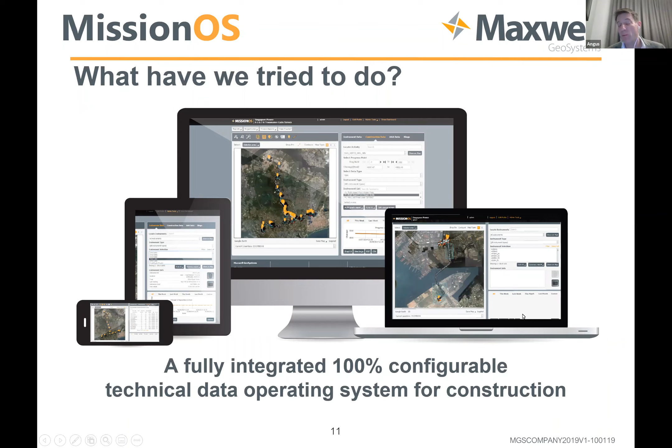Rather than sell the project, I wanted to go through a history of how we developed and got to where we are. The first kind of contract I was involved with was a good old-fashioned engineer's design using the ICE conditions of contract - called design bid build in America. This was a deep tunnel contract in Hong Kong called a strategic sewage disposal scheme.

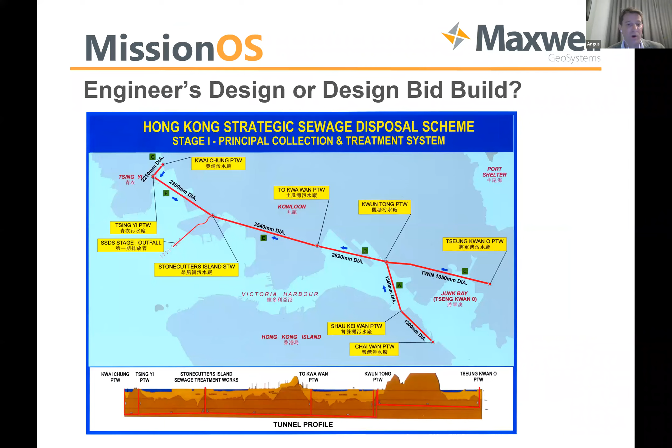Bill and I were both on this job when it went quite badly wrong, because we had lots and lots of water. This was the tunnel in 1993, and this was just one outflow from a probe hole, about 1,000 litres per minute, about 10 bar.

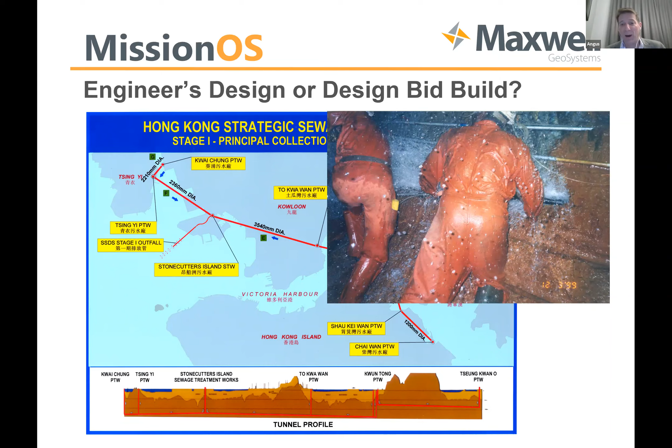Now, characteristic of these jobs is that there's two sets of records - the client's records and the contractor's records, with man-marking from both sides. So the focus the whole time is on which of these records is right, and what to do if there are differences in the record. Do you throw all the records out, or what? It's largely a waste of time really, because the lawyers have spent a lot of time looking at the data and identifying what is the data.

Ultimately, on this project, this is when I set up the first construction data management system, because I knew the contract was going to end up in arbitration. We set in place a system that managed every 15 minutes of time, and it was completely auditable - so if the shift report records said you had probing done or cutter changes done, there was a record in the system for that.

Now, the arbitrator on this contract identified the data records as being key to the outcome of the job. One side provided all the data, the other side cherry-picked the data that supported a particular case. As a result, the outcome of the arbitration, if you like it to a tennis score, was 6-love, 6-love, 6-1. This was an impossibility arbitration for a 26-kilometre tunnel project.

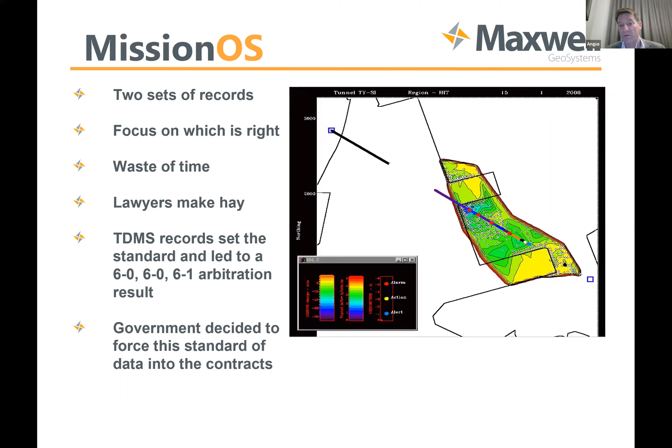Now, the government decided that they liked having the data in this sort of quality, so they decided to force this standard of data into the contracts. They actually wrote it into the construction contracts from then onwards. This was 2005 in Hong Kong.

You can see on the right-hand side and left-hand side we've got large span, low cover, large diameter machine going in. There's a second tunnel to be excavated between there and that big tie-back wall. We've also got a large hard rock TBM, and we've also got very poor ground conditions.

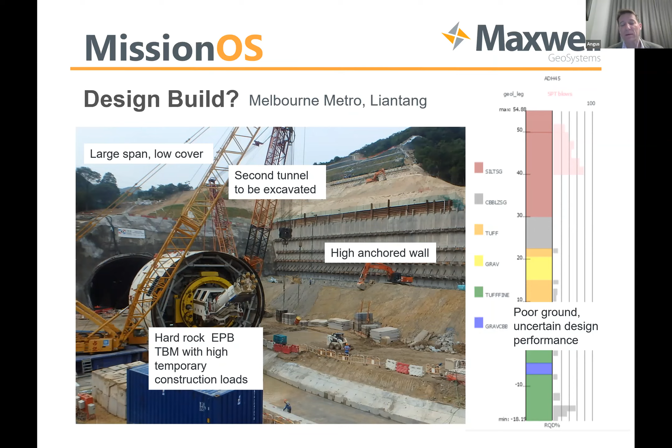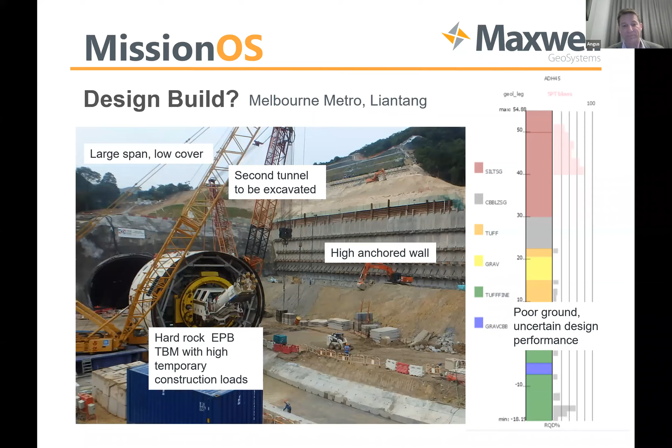The nice thing about this design and build approach was that whilst the system to manage the data was required by the client, after a period of time the contractors realized they could use this system to support the management of uncertainty. In this case, they used the system to log a lot of information supporting alternative designs to the construction of this portal. In fact, they saved about 7 weeks of program by being able to remove a lot of the steel supports by using the data effectively.

In this case, the client specified a system, and on the Melbourne job it was what's called a MIMS system—just the instrumentation plus a certain amount of progress of the works. In Hong Kong, the TDMS system, that's Tunnel Data Management System, has progress of the works plus the instrumentation plus the construction records in it.

Now, some contractors feel that a system put into their specification by the client is a noose by which to hang themselves. So there is a reluctance for them to actually conform to provide the records that are requested.

However, in the modern systems we can provide private areas. In this case, on this project, because the alternative design was the contractor's, there was a private area where his information could be used and kept private to himself for his own IP.

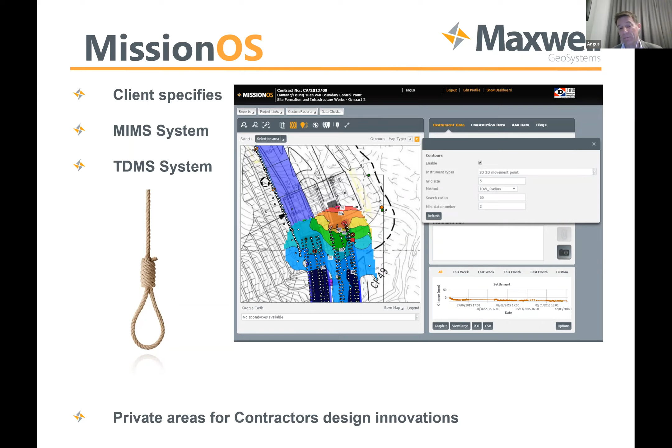Now, after about 2005, we entered into a period of alliances, particularly in Australia. They also did some alliances on particularly difficult jobs in Hong Kong. And now we've gone full circle, and alliances are quite common and certainly being promoted in Australia again.

In our alliances, there's one party, there's a target cost. Even if you are employed by the client or by the contractor or by the designer, you wear the hat of the alliance. The great thing about this is there's one set of records and one system, and it encompasses all the data. Everything is done on the job for the general project benefit.

I have to say that in my experience from a technical perspective, alliances have been the best technical solution to delivery of projects. The reason they're not used so much these days is because sometimes clients feel they're paying too much, and sometimes there's the pain share, gain share, which is unpalatable in certain cases. But from a technical perspective, these are very good.

What we have found is that engagement with regard to the use of systems in this is excellent. There was a partnering approach to delivery of data, the use of data on the job, and everybody is involved. So that gets a big thumbs up from me—no noose by which to hang themselves. Claims are dealt with by the alliance. They apply cash flow, identifying cash flow as required to reach the target cost if they can.

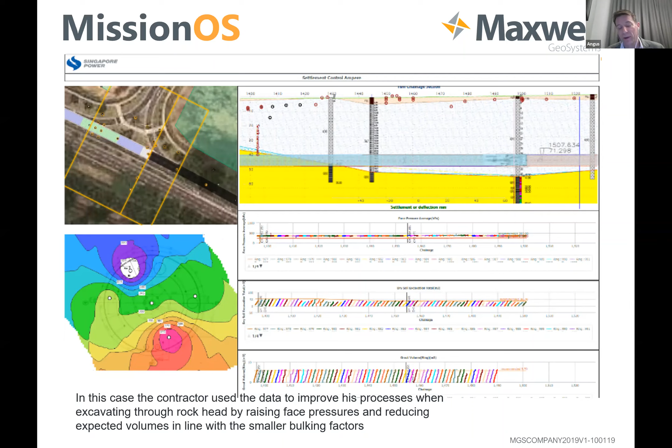Now, in the UK, there is wide adoption of the NEC contract, and an alternative to partnering or alliancing is a sort of early contractor involvement kind of tendering. This is a 2-stage tender where there's initial appointment of contracting groups, and then a period whereby the contractor and the client work towards refining a target cost of the system.

We've talked with a number of people about this, and on some projects, the systems have been left till the last minute, until the target cost has been identified and cemented, and then they come in and say, right, we'll have a system. So actually the discussions at the moment are that systems on projects should be considered as part of the ECI phase, as a value engineering exercise, to identify ways to promote risk reduction, look at automation, cost reduction, and do jobs with smaller, more focused teams. And what's happening now is they're starting to be considered as a joint client and contractor innovation.

Now, this means that the systems start to get discussed and implemented before the contracts are finally awarded. And that's in play now on a couple of projects in the UK.

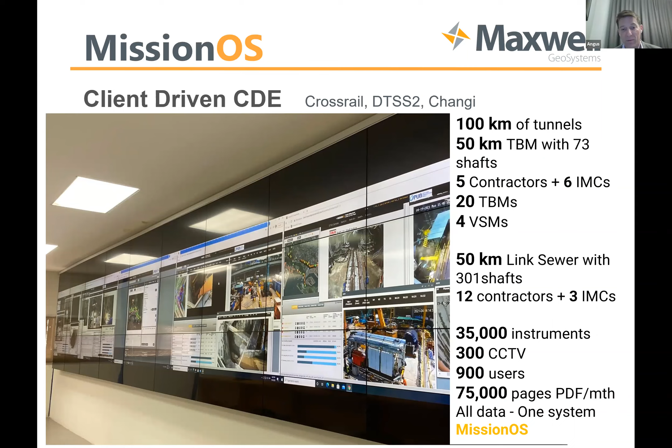We've got more than 300 CCTVs linked into the same platform with biometrics. And one of the very interesting things here is that all of the reporting now is done through the platform. So on this one, it's up to about 75,000 pages of PDF per month being generated on the project, and a lot of that is highly automated.

So what can we do when we get it right? Well, one thing that clearly happens, and I think everybody on the projects for DTSS2 or in London now agrees, is that communication is hugely improved. Compared to previous methods of managing this sort of data, the processing and the communication, providing reports and updating things, we'd say there's probably an 80% reduction in time taken and a 500% improvement in response time.

So we can also de-risk projects. Being able to get to all the data means that you can see, forecast, and predict much better. The claims process is simplified because we agree the data at the time. There is no post-event interpretation, let's say, of the data or the factual data. It's there and it's agreed at the time, and the claims process is just about agreeing the method.

Clearly better forecasting. The more information you can get together in one place allows people to forecast more reliably. And if the data is in a format that's easy to access, then engineers can focus their time on doing great things. That's the greater capability element we've got at the bottom.

But there's also this realizing the opportunity. There is always uncertainty on a construction job, particularly in tunneling projects. Giving engineers the opportunity to manage that uncertainty, look at alternative designs using observational engineering, forecast, and identify new means and methods, I think is really important. And data is the key to unlocking that opportunity.

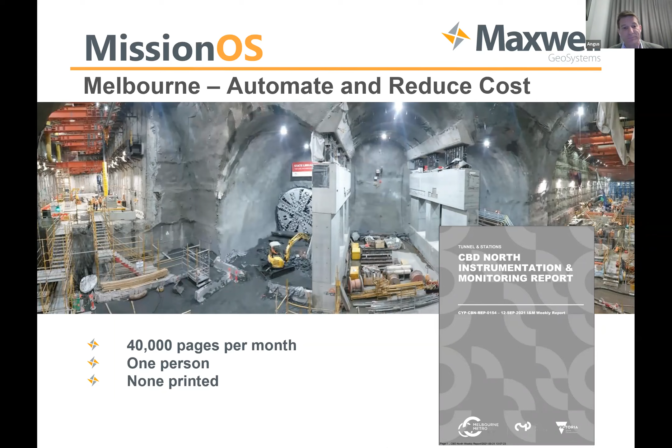The nice thing about having this data in one place is we can reduce meeting time. We can do pre-preparation, give people reports on the fly, and they can look at them when they come into the office. We can also create digital twins so people can have a combined understanding of what's happening on the job.

This is HS2 in London, and we've got a combination of all the instrumentation. We do the progress monitoring of construction works in the same system. We have all the instrumentation in here, we even have the LiDAR data all in one environment, so everybody has the same understanding of the works.

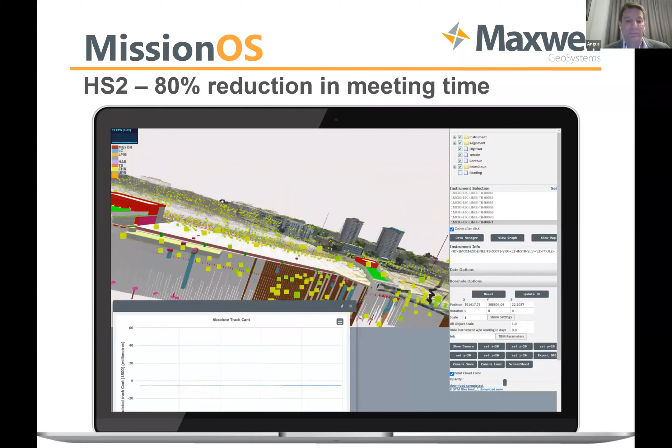Every day on this job, they have to do a shift review group meeting on all sites where active works are going on, happening anywhere between 8 and 9 in the morning. The system generates all the reports to them on the fly, well in advance, so they can review them. Then the system works them through the process of doing the minutes of the meeting and approval, and will sign off the meetings for them through an email, which they click on and close.

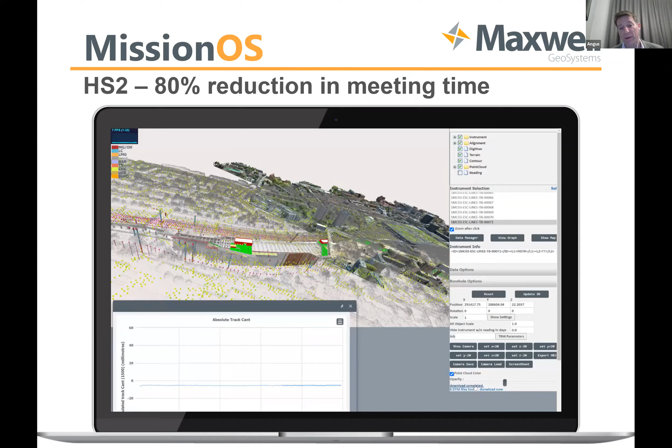Now, what I want to do to finish off is show you an example of how data really can improve understanding on our project from a geotechnical point of view. So I'm just going to go over to a browser.

Okay, I've just shared a different screen. Screen. Okay, hopefully you can see the screen.

This is a view into our MissionOS platform, and this is actually one of the world's first variable density machines, coming through karstic limestone. You can see here the contractor's long section showing some areas of karst. The tunnel alignment is down here at the bottom of this grouted block.

Now, what we can do is, if we just select the area in here, with our digital twins we don't use CAD. A lot of BIM or digital twins now is focused on CAD systems, but we actually use a kind of gaming rendering, online gaming rendering. If anybody's seen Minecraft, the same kind of technology is used behind that, which means you can do very fast rendering of three-dimensional objects.

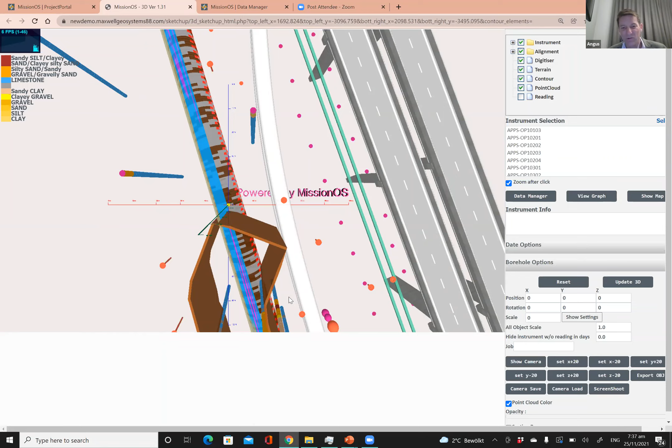So when you talk about BIM, building information modeling, we actually focus on the information bit of it. The information is held within the system, and the 3D bit is just generated on the fly. So what you can see here is everything that was on that GIS is now created in 3D.

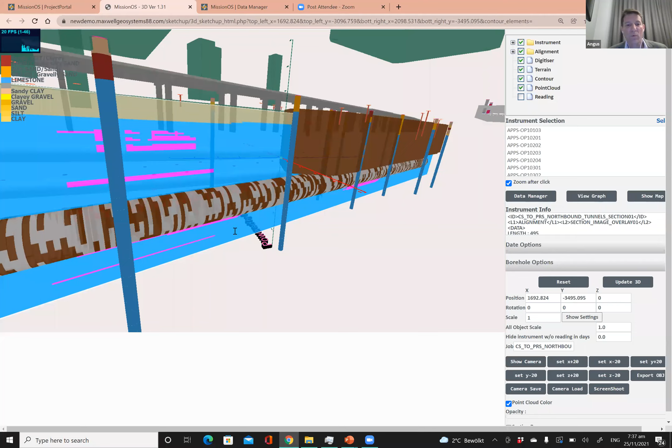Now you're looking at that section where we've got the karstic limestone. Here's the limestone, here's the cover, and here's the karst. Now we can click on this wall, and I can show you RQD. This is geostatistics - this data is created using geostatistical modeling. So we can model RQD, and we can also model the probability of encountering voids.

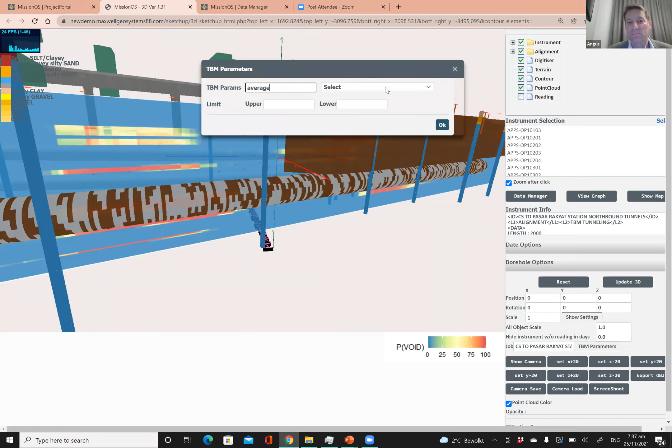So what we can do is click on this tunnel, and I can now bring in the TBM parameters. I'm going to plot the average face pressure. It sounds like a cookery program. No.

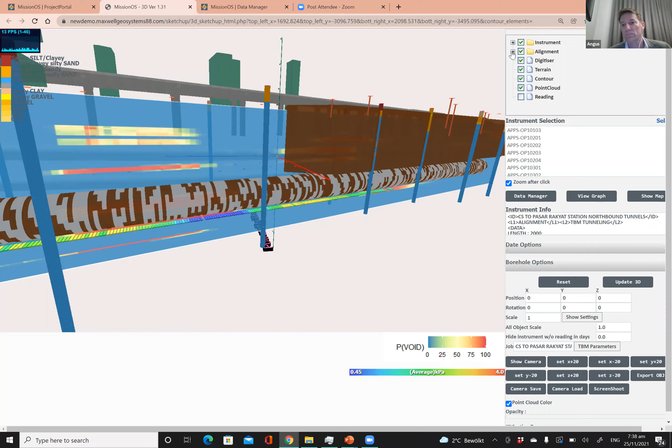Okay, so what it'll do is plot the TBM parameters below the base here. Wait for it. There we go. Let me just get rid of the tunnel, move this down here. What we can see now is here's the face pressure - we're running at about 3 bar all the way through here.

Boom, blue, lose it all. Luckily this was the trial section, so nothing happened. But here is a blue section where they lost the face pressure, changed the mode over about 15 rings until they came into EPB mode, and then carried on okay.

But look at the statistical, or geostatistical, prediction for the ground conditions - it actually gives a pretty good estimation for where the ground, or the likelihood of there being karst, occurred. So by building these methods in, it's really quite good at giving you advanced prediction of what may be there.

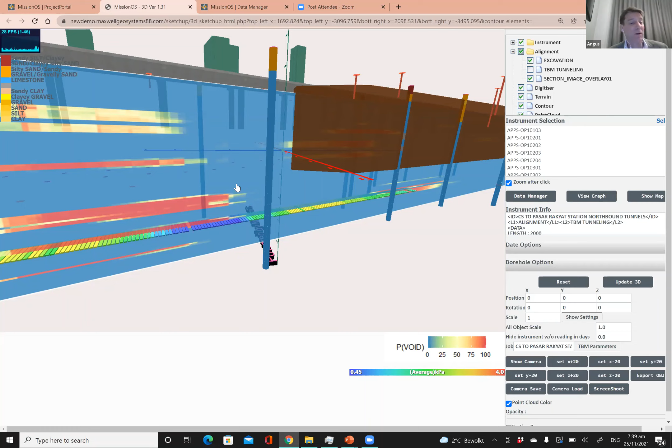And the good thing about the geostatistical methods, and there are other methods used too, is that they're driven by the data. So any new boreholes that come up can give you a new interpretation.

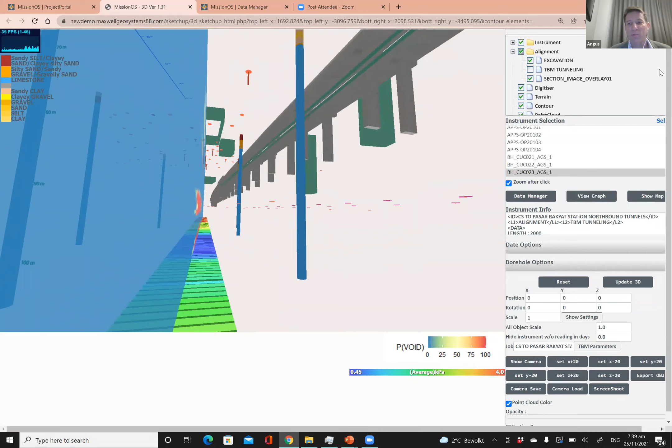Imagine - and I've always said this - driving a tunnel these days is like driving a car with the headlights off. If you're in a tunnel, and I'll put the tunnel back on, this is what you could see. So why do we not have this information in the TBM so the driver can see what's coming and address it? Had he changed his mode here, he would not have had this issue.

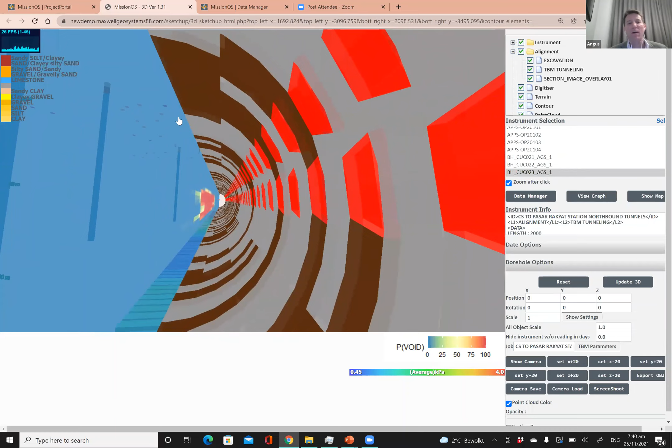Now I could show you a lot of things in here, in terms of tracking, even the segment yard and the segment construction and whatever. But I'll leave it there, and hopefully we've got some questions.

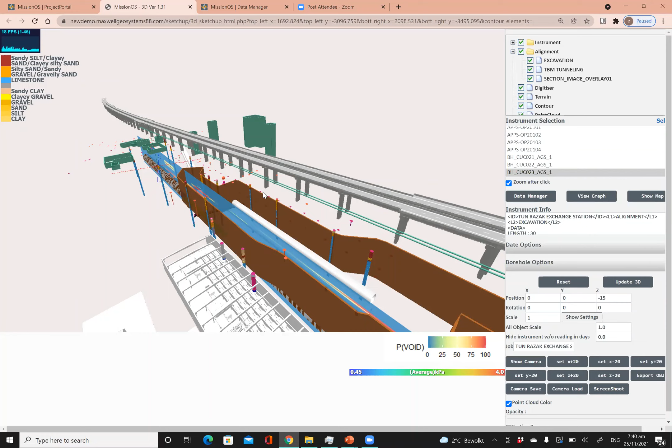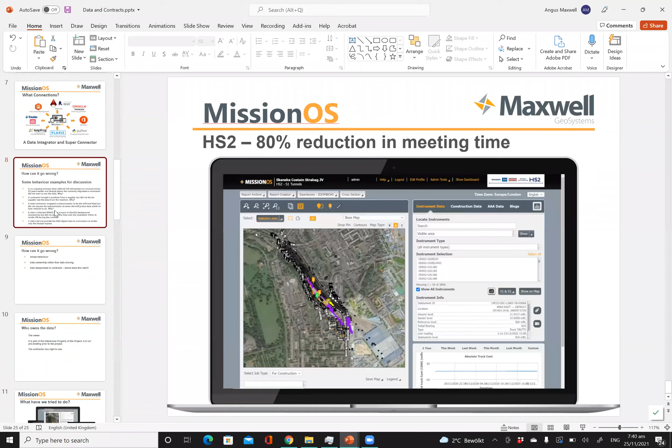I'd like to go back to the questions you asked of yourself, Angus, if we could, while we wait - let's find those questions. The ones at the beginning. Yeah. These ones. Yeah. So, well, I'm sure you've got answers to these. These are all real-world examples, right? Yeah. So I think it's only me and you talking.

I'll give you an opinion. The first one, in a claims environment, you don't want to, certainly after the contract, discover information that would potentially, or you feel might potentially, scupper your ability to claim on a project. So it seems crazy that somebody doing a job might not want to see information that comes to light. But if it impacts commercially on the job, there may be a line of thought to say, no, I don't want to know - I was given certain information, and I'm going to go to the client with a claim on the basis that he did not give it to me.

Yeah, I think that deals with the first three, doesn't it, really? Possibly not the third one, actually. But what's even more fascinating is why a client would go out of their way to not help a contractor understand the job in the fullest extent.

Exactly, the age of digital data. Before I came out to Asia, I was involved in High Speed 1, and was responsible with a small team for managing 5 big ground investigation contracts. We put together a geotechnical database that was provided to the contractor during the tender period. They could log into the database - it wasn't on the web in those days, it was 1994 - but they could log in and access all the digital data and download anything they wanted to view. I've never seen that done again. Whenever I try to get the AGS digital data for a contractor from people, it's like no one's asked for this before.